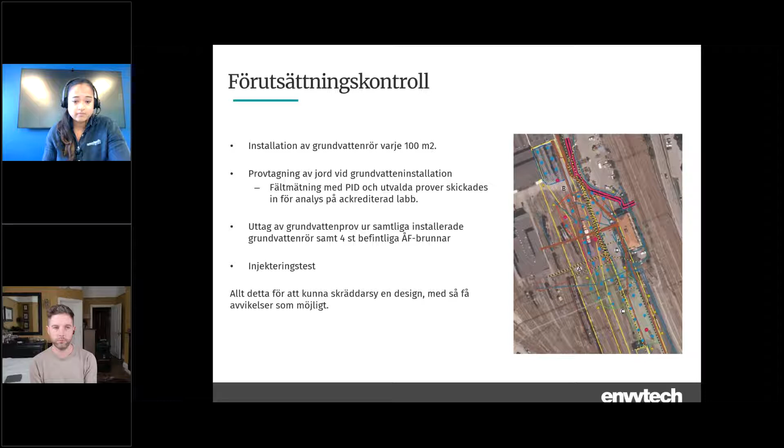Resultaten från förutsättningskontrollen visade att det förorenade området som fanns i förfrågningsunderlaget ökade både i djup och bredd. De 18 000 kubiken som man egentligen skulle hantera ökade med 67% till strax över 30 000 kubik.

När vi även gjorde undersökningen så såg vi att det fanns flertal kontrollbrunnar med frifas där vi kunde mäta upp till 30 cm i vissa brunnar. Vi fick även 9 stycken kontrollbrunnar som påvisade föroreningshalter över 30 mg per liter, det vill säga koncentrationen petroleumföroreningar, vilket är ungefär brytgräns för när man kan påträffa frifas. Och allt detta gjorde att vi fick tänka om designen lite grann, eftersom de föreslagna behandlingsprodukterna inte är anpassade för att behandla frifas.

Under förutsättningskontrollen så kunde vi heller inte hitta en avgränsning ut mot stambanan eller mot det vi kallar för Vita villan, det är den byggnaden som är öster om. Vi kunde heller inte hitta någon avgränsning mot diesellokverkstan eller runt vändskivan, vilket gjorde att vi behövde fundera ut hur vi skulle hantera de här områdena.

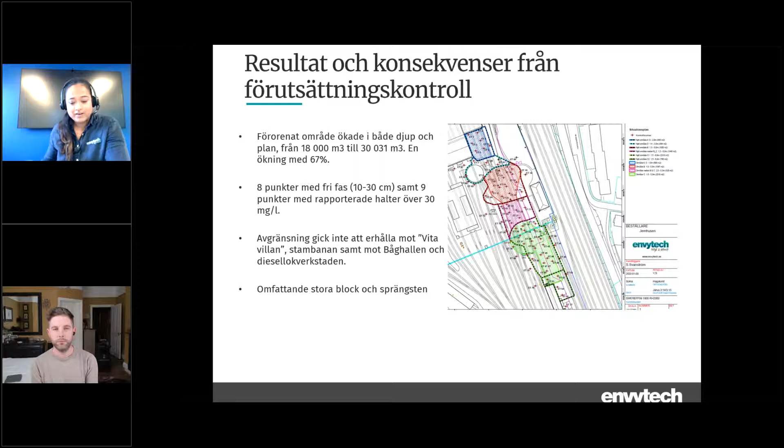Den fria fasen var något vi inte kunde utläsa i förfrågningsunderlaget, men som vi stötte på, och den var vi tvungna att hantera. Planen var att hantera den med vakuumextraktion. Det är 2 områden där vi hittade frifas: den norra delen där tankstationen finns, och den södra delen där cisternerna fanns.

Det vi gjorde var att installera vakuumextraktionsbrunnar lite tätare inom områdena. Totalt sett installerade vi 28 stycken. De här vakuumextraktionsbrunnarna kopplades sedan till vakuumpumpar som bestod av pumpen i sig och sedan ett kolfilter för att hantera ångorna.

Från pumparna pumpade vi vätskan till en vattenreningsanläggning som bestod av en oljeavskiljare och filteranläggning innehållande sand och kol. In situ-saneringen med vakuumextraktion pågick i 6 månader innan vi inte längre såg någon rebound av frifas. När vakuumextraktionen avslutades hade vi hanterat strax över 40 ton produkt och renat 497 kubik vatten.

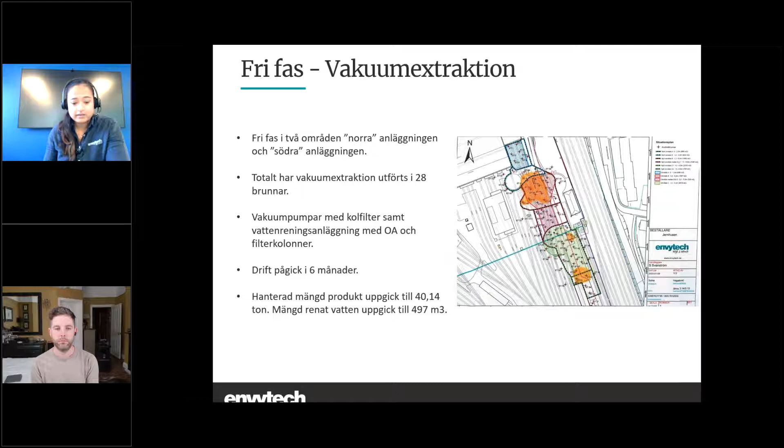Den design som togs fram gick ut på att vi skulle injektera kemiskt oxidationsmedel i hela jordprofilen, och detta i 3 omgångar. Sen skulle vi även gå in med en omgång syreavgivande medel för att stimulera den naturliga nedbrytningen. Produkterna som vi hade tänkt oss för saneringen är inte heller riktigt lämpade att använda i den omättade zonen, så vår tankegång var att försöka överdosera produkt i det området.

För att säkerställa att vi inte får någon återkontaminering ner i de mättade zonerna, där vi vet att produkten har en bra verkningsgrad, beslutade vi att installera en kolbarriär horisontellt vid smearzonen inom hela området. Genom att ha den här barriären installerad kan vi också säkerställa att den förorening man kanske inte kommer åt, på grund av ledningar eller andra installationer i marken, inte perkolerar ner i det redan sanerade området.

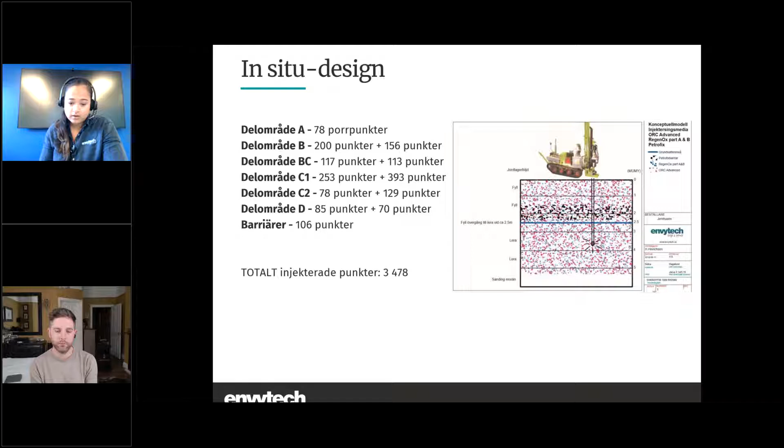De produkterna som vi använde oss utav var RegenOx Part A och Part B, som är kemiskt oxidationsmedel. Vi använde oss också av ORC Advanced, som är det syreavgivande medlet, och till slut Petrofix, som används som en aktiv kolbarriär. Jag tänkte att Jack nu skulle få presentera de här produkterna lite mer.

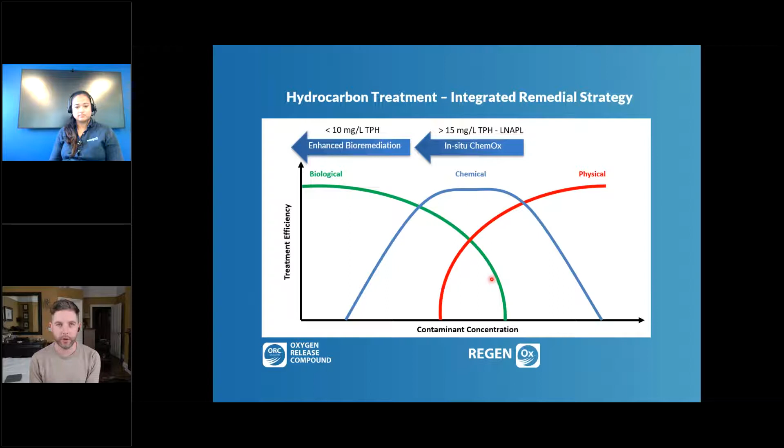So we then went further. We utilized a technology called ORC, which stands for Oxygen Release Compound Advanced, to enhance the aerobic bioremediation at the Hagalund site. So we went from physical treatment, removing as much of that free phase as possible, then dropped onto in situ chemical oxidation to drive those dissolved phase concentrations down, so that what was left over was more amenable to aerobic bioremediation.

Now we also had an additional product that we used here. At the time of the Hagalund going ahead, it was considered quite a new technology. It's now been out for about 3 years, and it was Petrofix, this liquid activated carbon. To date, Hagalund is the largest Petrofix job ever completed across Europe.

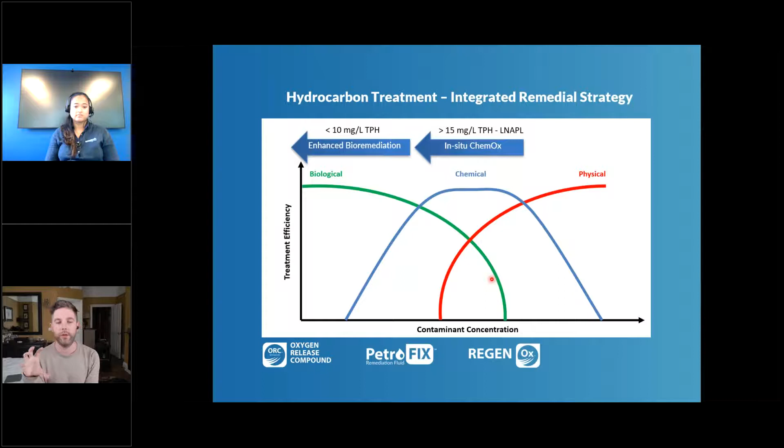And here what we did is we installed that horizontal barrier to stop percolation of contamination if there was anything untreated, or if there was a future spill, being captured by the Petrofix barrier, so sorbed and then biodegraded as well.

So the first technology I'll talk to you about then is RegenOx. So RegenOx is an in situ chemical oxidant. In situ chemical oxidation is the in-place treatment through the addition of a chemical oxidant.

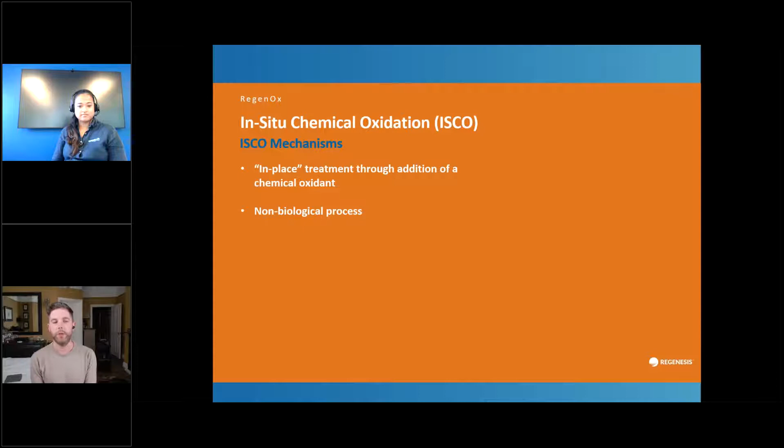It's often thought of as a biological process. Sometimes people get in situ chemical oxidation and bioremediation mixed up. It isn't, it's a non-biological process. It's essentially a redox reaction between the chemical oxidant and the organic contaminant.

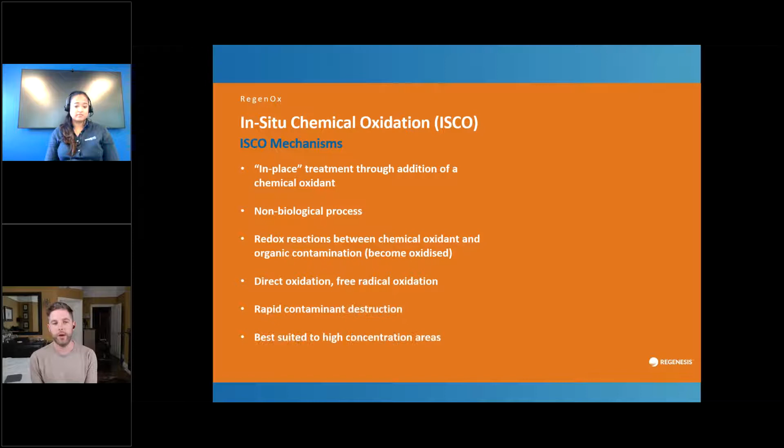It's a very useful technology if you're looking to clean up a site very quickly, as they were here at Hagalund, because it reduces contaminant mass very quickly and can then lead on to additional phases of treatment.

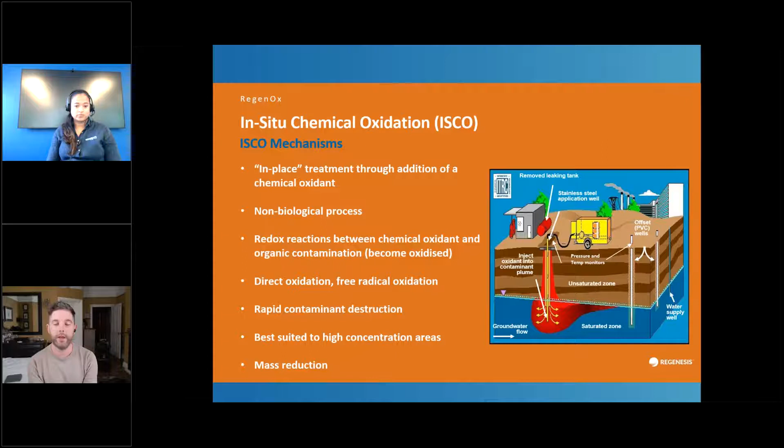Chemical oxidation historically, though, had a number of problems. People would use hydrogen peroxide to activate things like chelated metals, and you'd end up with a large exothermic reaction, quite an explosive reaction, that led to issues with increases in temperature or pressure in the subsurface, and also had a number of safety concerns to the site personnel applying the product.

It was also that some chemical oxidants are not compatible with underground infrastructure. Here there were cables and other services running beneath the site, as well as above ground infrastructure, so the rail tracks etc. And some chemical oxidants can corrode metals and surfaces in the subsurface, and they can also corrode pump and treat systems as well. So here in parts of the site, they were doing vacuum abstraction and the injection was going on elsewhere.

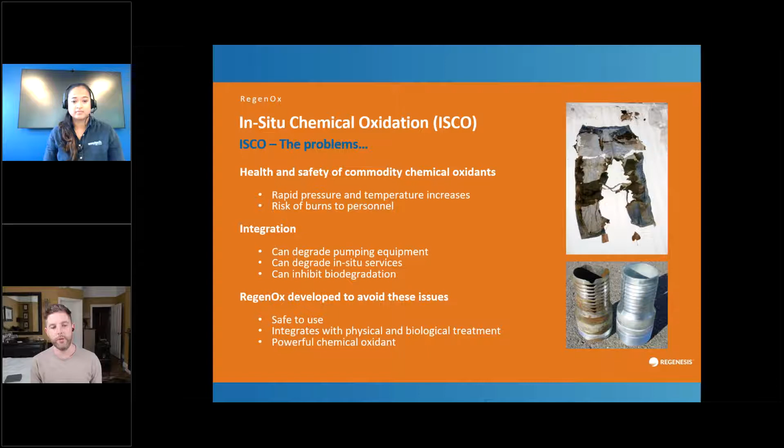So we developed RegenOx to overcome these problems, to make it a very safe technology to deploy. It ensured that it integrates well with pump and treat and biological treatment without compromising on the power of that chemical oxidant.

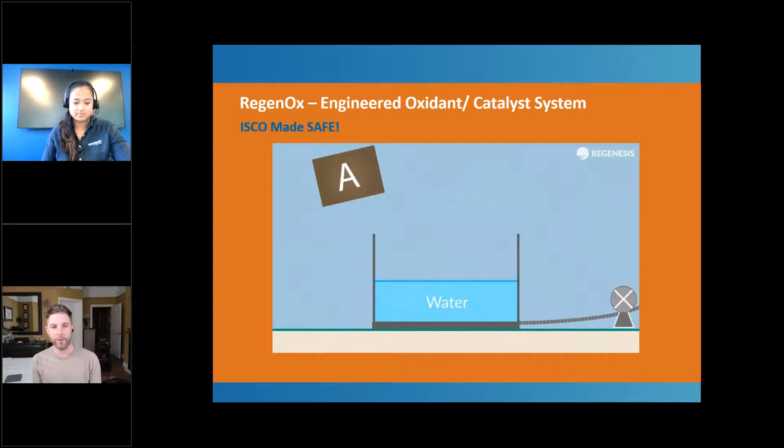So in terms of what it is and what it looks like, it's a two-part product. Part A is a white powder, a percarbonate-based chemical oxidant. And then part B is this iron silicate catalyst.

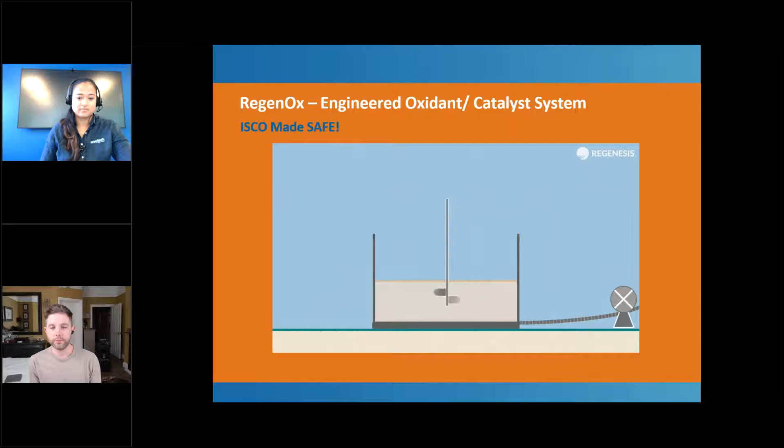Typically, you mix that at 5% with water, and then you simply inject it, as EnvyTech did in Hagalund, using direct push injection, but it can be injected into wells or applied into excavations into the subsurface.

Now, as I said before, some of the key things with RegenOx is that it is very safe to handle and apply. This was an active rail site, so you couldn't use something that was dangerous. And we've slowed that chemical oxidation reaction down so that it has significant longevity.

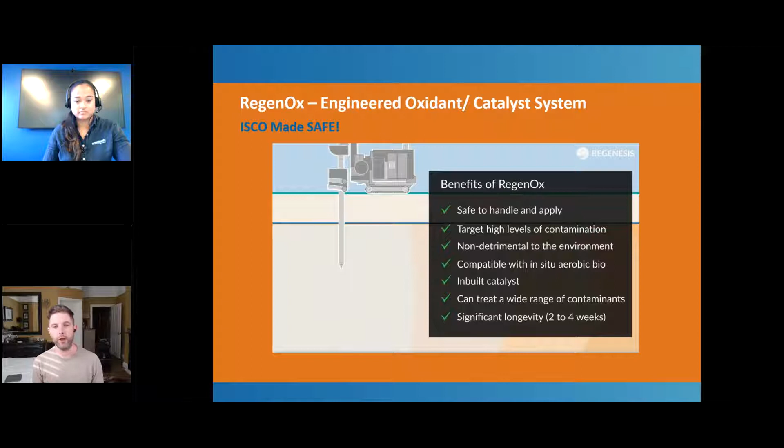So it actually has a residency time of about 2 to 4 weeks. Now that's important. You want your chemical oxidant to be active for an extended period of time, because the longer it's active for, the higher the probability of that contact occurring between the oxidant and the contaminant.

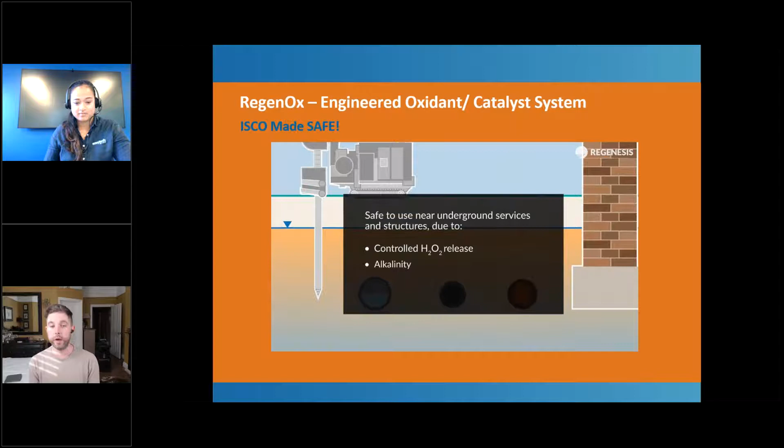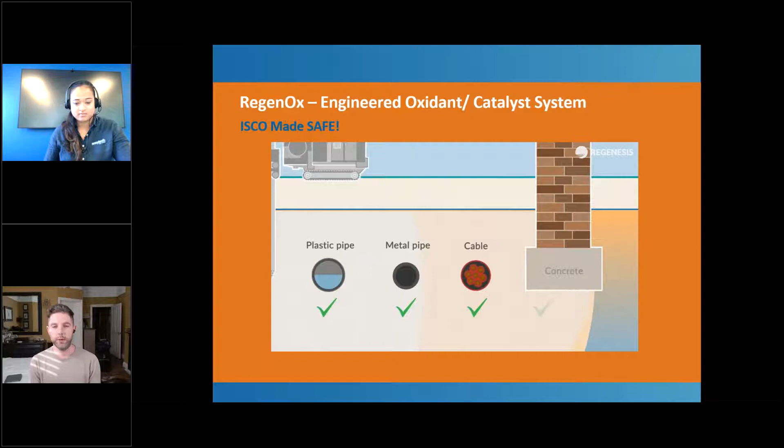Now, again, as I sort of highlighted, it was important that it was compatible with underground and above ground infrastructure. With RegenOx, you can inject it right next to plastic, metal pipes, electricity cables, and right up against foundations as well. Some persulfate-based chemical oxidants can corrode things like brick and concrete. Here we didn't have this problem on this particular site.

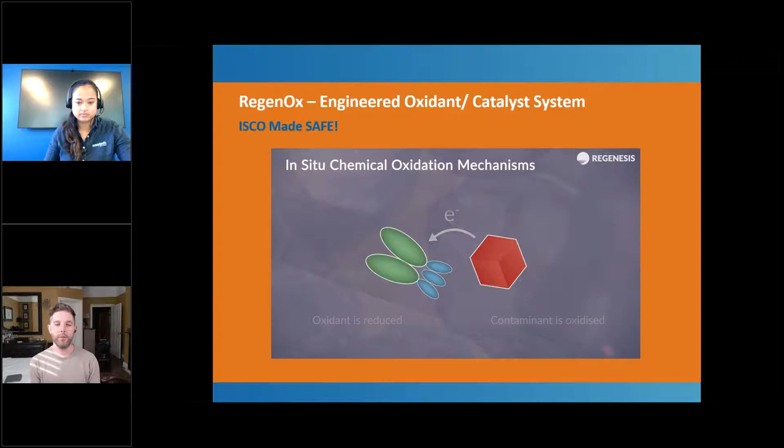In terms of the chemical oxidation process, what's going on? What you have is your contaminant and your oxidant. When they make contact, the oxidant becomes reduced and the contaminant becomes oxidized. You get that exchange of electrons that breaks apart those chemical bonds and destroys the contamination in situ. So that's direct chemical oxidation.

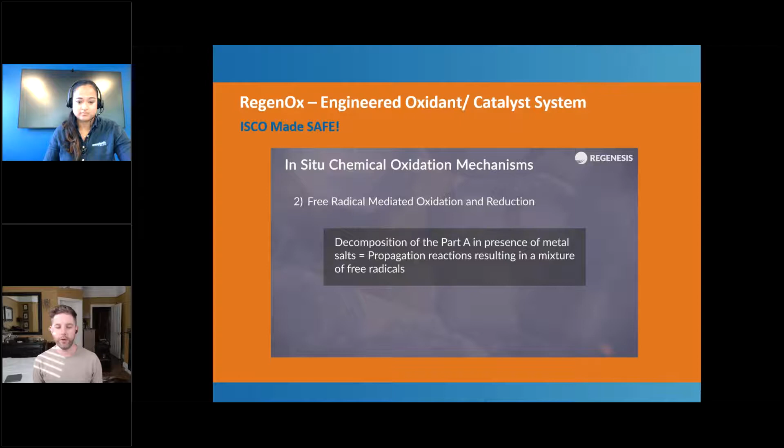What also happens is once the RegenOx is injected into the subsurface, it will start to decompose in the presence of ambient salts and metals. And as it decomposes, it will generate these things called free radicals. Now, free radicals are just molecules with unpaired electrons. So they're really reactive, and they want to react with everything, including the contaminant. So as soon as they make contact with that contaminant, that exchange of electrons happens again, and that contamination is broken down in situ.

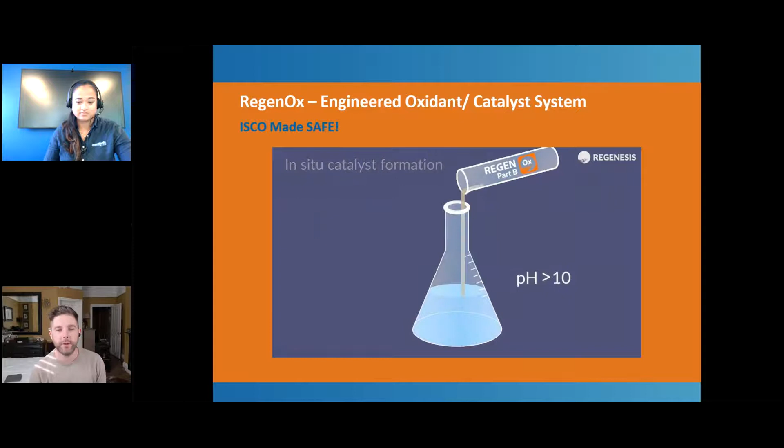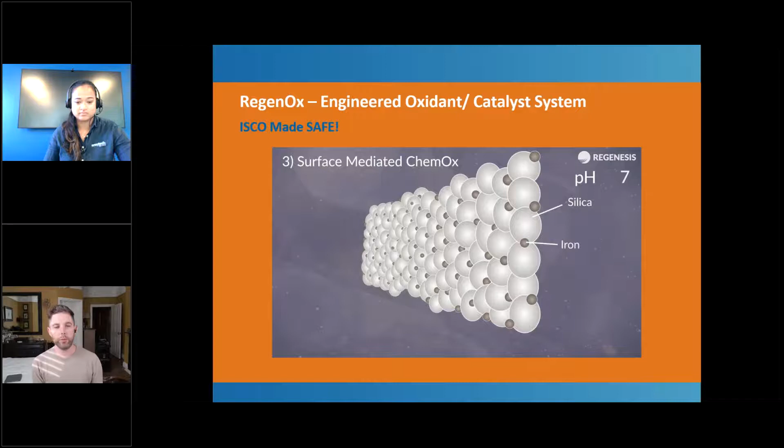Finally, the surface-mediated chemical oxidation. Initially, RegenOx is base activated, so it will raise the pH of the aquifer temporarily, but then eventually that pH will start to drop as it gets buffered out by the soil chemistry in the aquifer. And as that pH starts to drop, this iron silicate catalyst will precipitate, and it will provide a surface where the contaminant and that oxidant can make contact. So it's about improving that efficiency once that pH has dropped off in the subsurface.

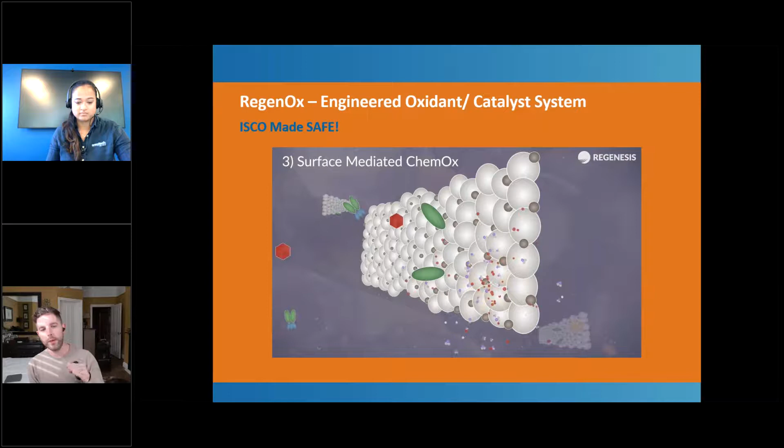So here in Hagalund, we were recommending multiple applications. This is typically required when you're looking at in situ chemical oxidation as a treatment method. The reason for this is chemical oxidation as a process occurs in the dissolved phase. So that's where those chemical reactions occur. The thing is, we don't just have contamination in the dissolved phase, right? We don't just have contamination in the groundwater. There's also contamination in the soil. So what we do is we recommend 3 applications to ensure that contamination in both the soil and the water is destroyed.

So after 1 application of RegenOx, you'll reduce the proportion of that contamination through destruction, through chemical oxidation, but largely the amount of contamination that is in the soil will be untouched. But what we've done here is we've created a concentration gradient. In the case of Hagalund, there's more diesel and hydrocarbon contamination on the soil than there is in the groundwater. So we've created that concentration gradient. So what does that mean? It means that you will then get diffusion because of Fick's law, and that contamination that's on the soil will partition into the water.

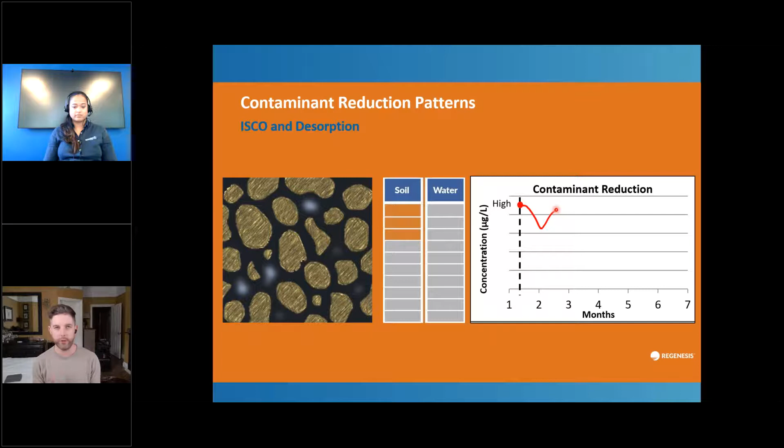So actually, when you've done 1 chemical oxidation hit and you let it then rebound, if you took your sample from your groundwater, it would appear that no remediation has happened, no reduction in contaminant mass has occurred at all if you're just looking at the groundwater. The reason for that is that mass has now desorbed from the soil, you've got rebound, and it's bounced back in the water.

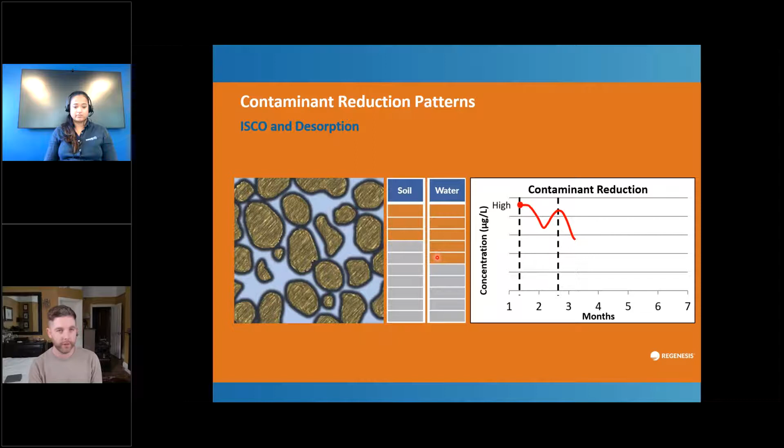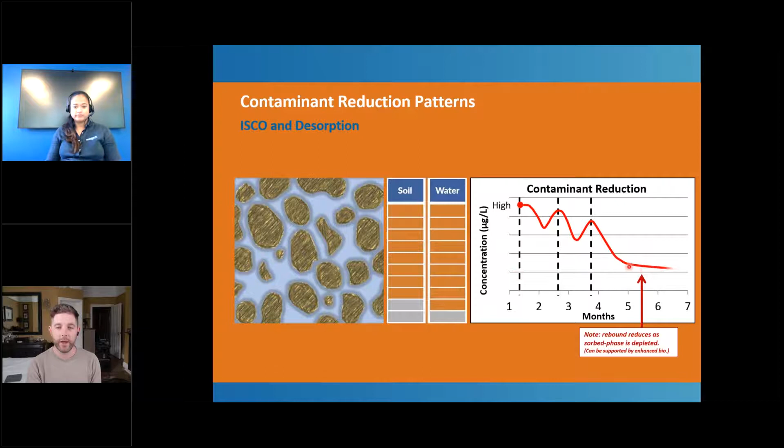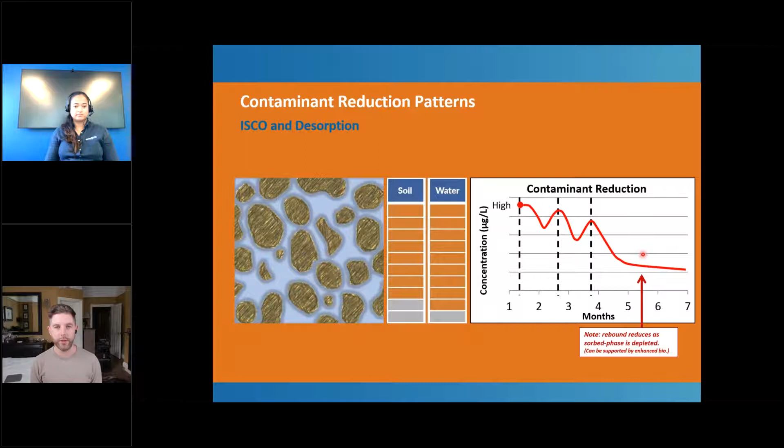So we do a second hit of RegenOx to remove that contaminant mass in the soil. You then, again, create this concentration gradient, slightly less so the second time. You then get this rebound. You then do a third injection of RegenOx. Sometimes you don't need 3, sometimes it can be 2, sometimes it can be 1, might need to be 5. We'll help you come up with a design for that to reduce that mass further in the water. And then you can follow it on with bioremediation. As those concentrations start to drop, contact becomes less and less likely. So it's at this point that we would start thinking about enhanced aerobic bioremediation to carry that contaminant reduction forward.

Essentially, what happens is that these microbes do take a bit of a knock, but by no means have we sterilized the subsurface. They're still there. And it's important to remember that these microbes grow exponentially. So 2 microbes become 4, become 8, etc. So they grow very quickly in the subsurface. What we've also done by undertaking chemical oxidation in this way is actually created an environment that is temporarily very favorable for aerobic bioremediation. So you've done chemical oxidation, you've partly chemically oxidized those petroleum hydrocarbon molecules in situ, and what you've created is polar, more soluble molecules.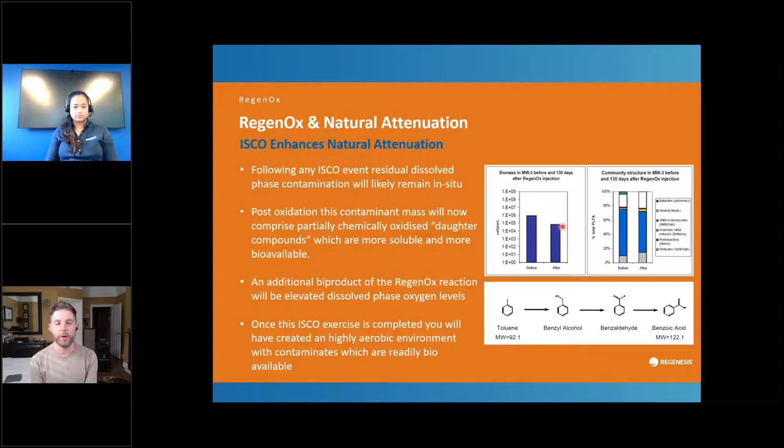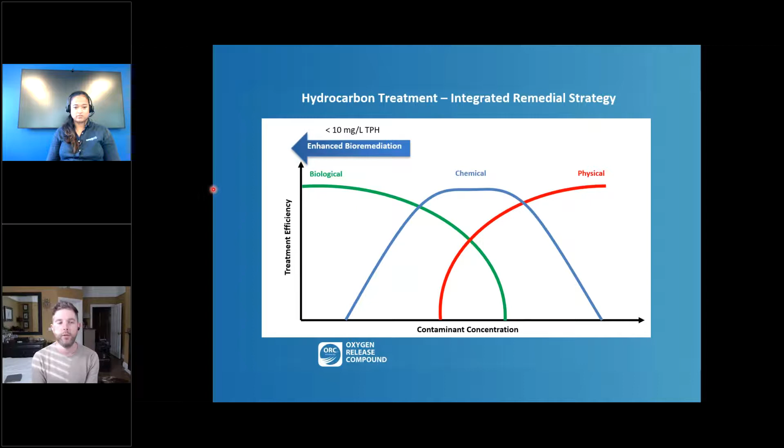But the thing is that oxygen won't last forever. It will get used up by the microbes to metabolize these contaminants that are left behind in the subsurface. So what you want to do is supplement that with a controlled release oxygen compound, something like ORC Advanced, which was used here, to maintain that biological efficiency right the way through long enough so that you hit your remedial targets. And the remedial targets here in Hagalund were certainly quite stringent.

So ORC, what it does is it increases the rate of natural attenuation. So it increases the rate at which these microbes break down that residual contamination. Now, the rate of natural attenuation is dependent on a number of different factors. So the contaminant type has an influence. So the type of petroleum hydrocarbon that you're trying to break down will affect how quickly those microbes will work.

So as an example, it's much easier to aerobically degrade gasoline than it is diesel. It's also much easier to degrade BTEX compounds than it is polyaromatic compounds. It's all down to the structure and crucially solubility of that particular contaminant. Now, environmental influences also matter.

So we do see in Scandinavia, particularly in my experience in Finland, that temperature has a significant influence on bioremediation. Here in the UK, not so much. Our groundwater temperatures are pretty static, but you do see in some cases, in some sites, particularly in the far north, where groundwater temperature dips below, say, 8 or 5, microbiology slows down.

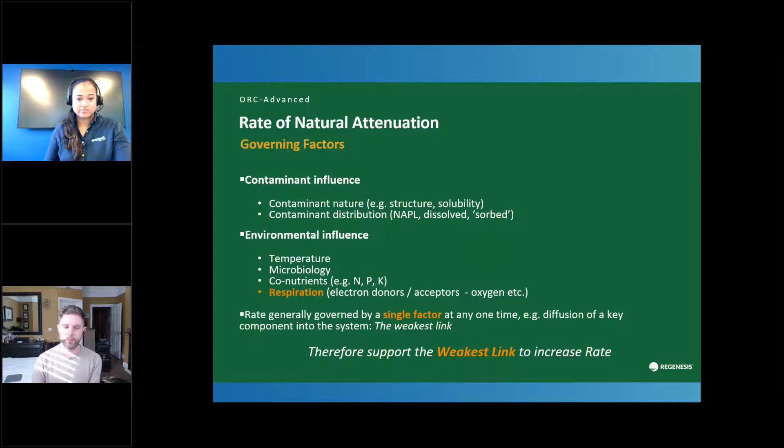Microbiology, so I would say for petroleum hydrocarbon remediation, I've yet to see a site where we've needed to introduce microbes into the subsurface to kickstart the aerobic bioremediation process. The availability of co-nutrients is important, but not critical. And often the single weakest link here is the availability of oxygen in the subsurface. So if you add oxygen, you create an environment conducive to aerobic bioremediation. You can kickstart this process.

And what these microbes are doing, they're cascading electrons from donor compounds to generate the energy that they need to live. So the food, in this case, is the contaminant, and then you have different electron acceptors that can be used to generate this energy. Now, oxygen is by far the best electron acceptor that they can utilize. They would favor that. It gives them the biggest payoff. It provides the most energy.

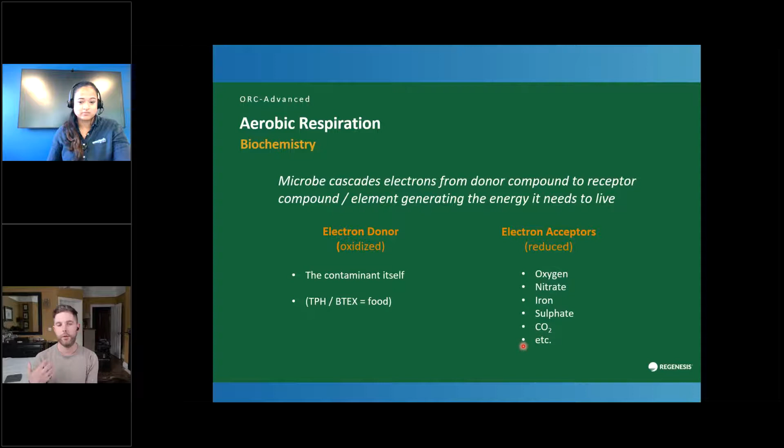But they can use other electron acceptors as well, such as sulfates and nitrates. But as you move down this redox table, the amount of energy that's released becomes less and less. So they prefer oxygen. So we have this product called ORC, stands for oxygen release compound. What it is, it's a calcium oxyhydroxide with a phosphate crystal interpolated into that structure.

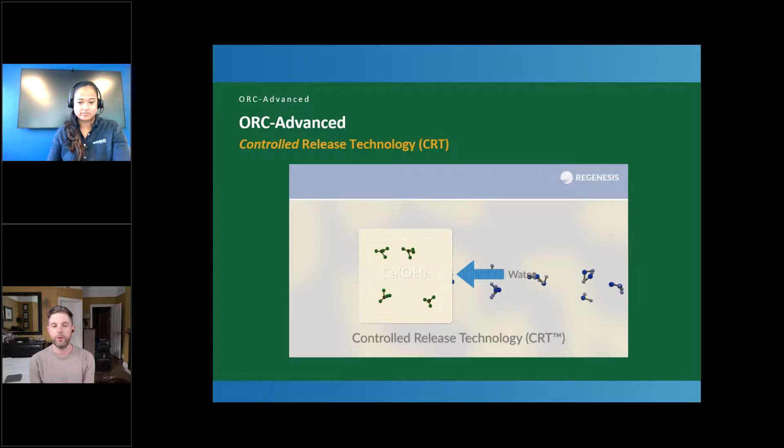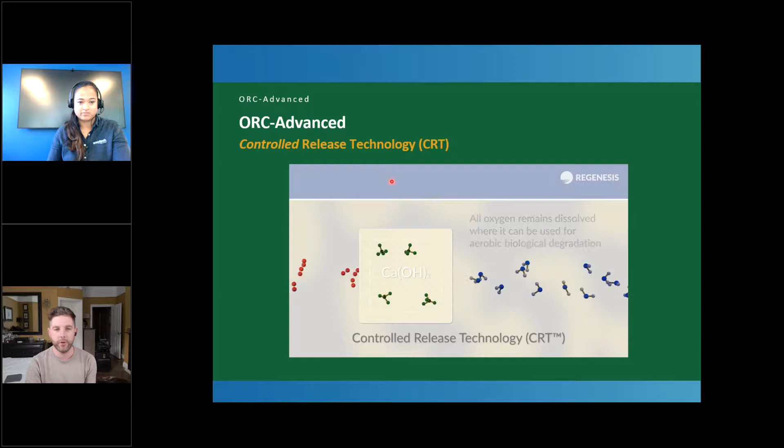So what happens is when you inject it into the subsurface, it starts to dissolve. And as it dissolves, it releases oxygen into the dissolved phase. And it's able to do that because that release of oxygen is controlled and regulated by these phosphate crystals interpolated into the structure. So it slows that release down and it ensures all of that oxygen is released into the groundwater. And that's important because if you had lots of bubbling or off-gassing, that oxygen would just escape to the atmosphere and it can't be utilized by the microbes in the aquifer.

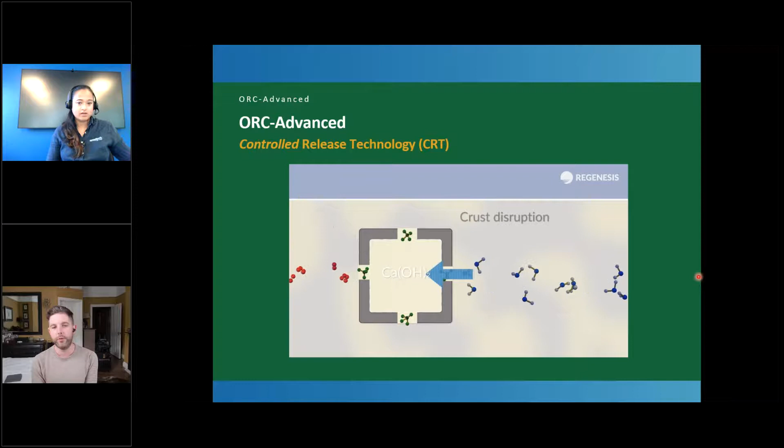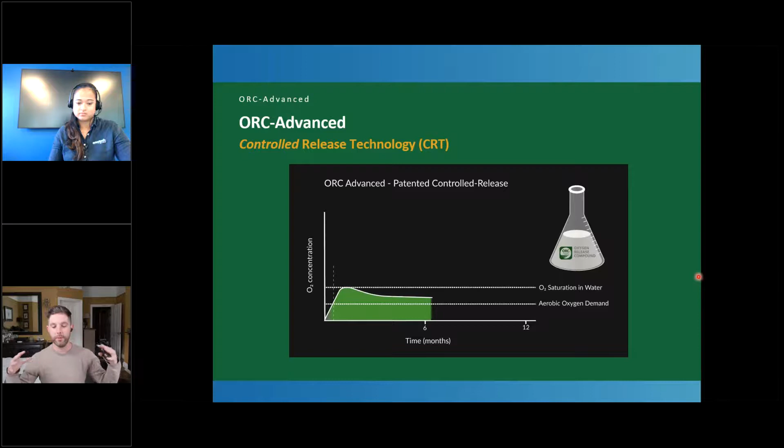These phosphate crystals also have another job. They disrupt an impermeable rind forming around the calcium oxyhydroxide. And what that means is you get a controlled release of oxygen over a 12-month period of time that will create a stable geochemical environment in the aquifer. So we grow as much microbial consortia as possible, so we can break down as much of that contamination as possible in a 12-month period.

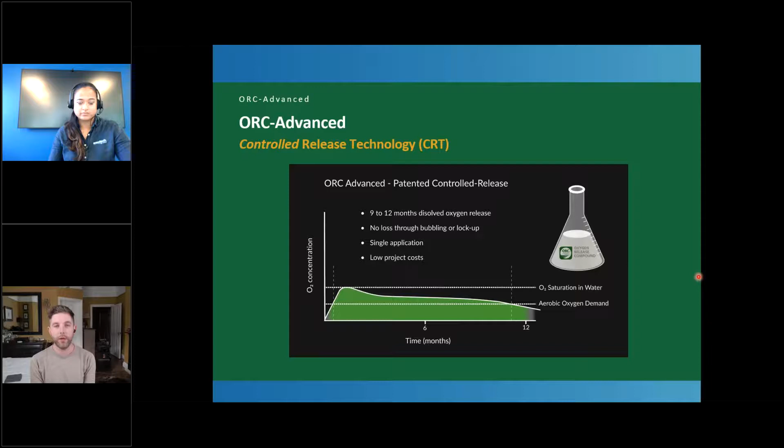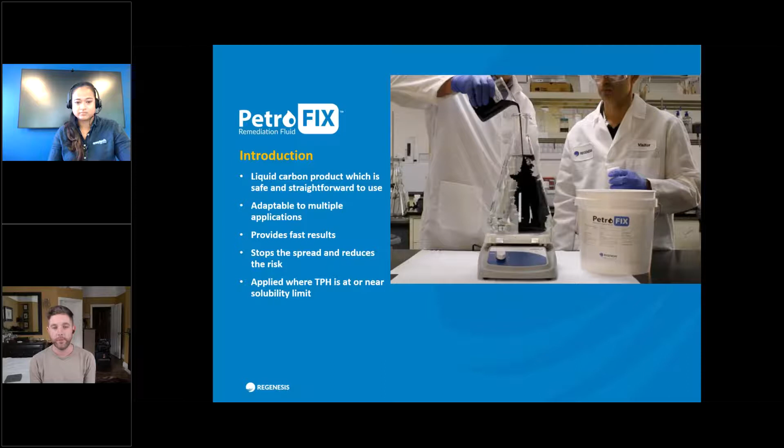Now, the final part that was used was PetroFix in a series of barrier configurations. So what PetroFix is, it's a two-part product. What we've done is we finely milled granular activated carbon down to 1 to 2 microns. So that's the size of a bacterium. That's smaller than a pore throat. It's about the size of a red blood cell. And what we've done is we've coated it in a dispersion agent.

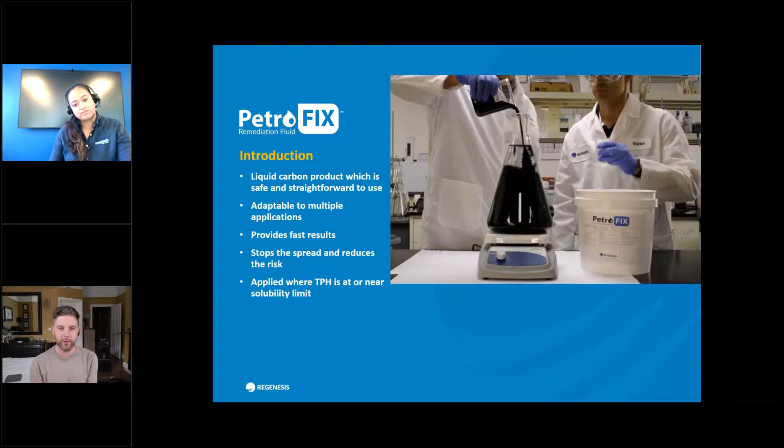So when you mix it with water, as you can see here, it creates this colloidal suspension. So milk is a colloid, ink is a colloid. It means that when you inject it into the subsurface, it flows very freely in the aquifer. There's a second part to this product, which is an electron acceptor blend that comprises nitrates and sulfates.

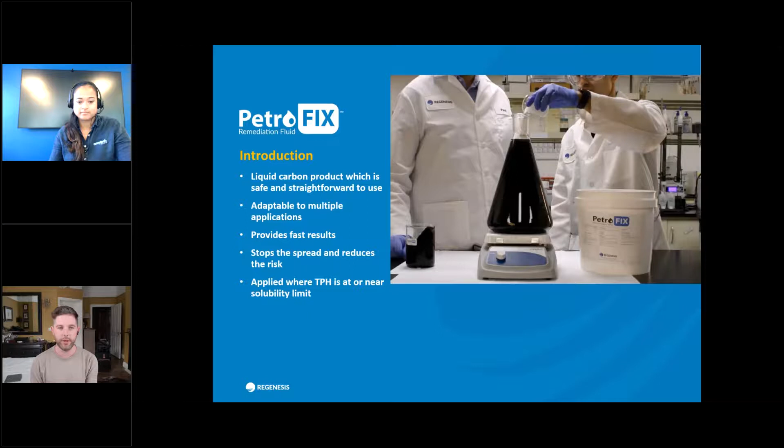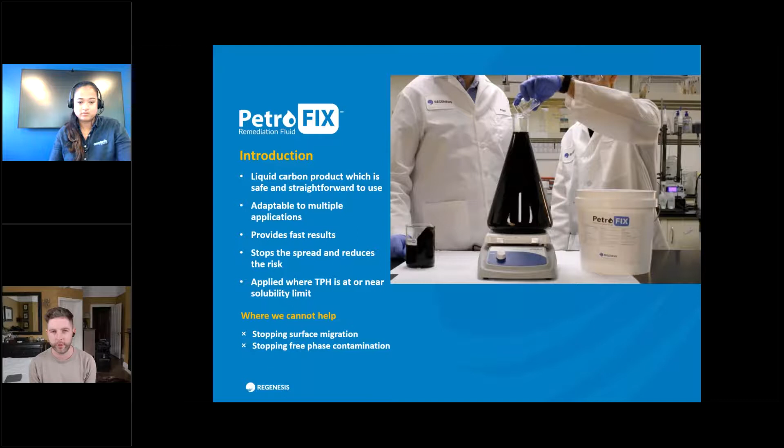That then helps to kickstart the anaerobic bioremediation process as well. As a technology, we can apply it where petroleum hydrocarbons are at or near solubility limits. It's not a technology that you can use to, say, stop surface migration following an oil spill, and it certainly can't stop free-phase contamination. However, if it does encounter free-phase contamination, it doesn't mean that it's broken. It's just going to take a while for those microbes to churn through it.

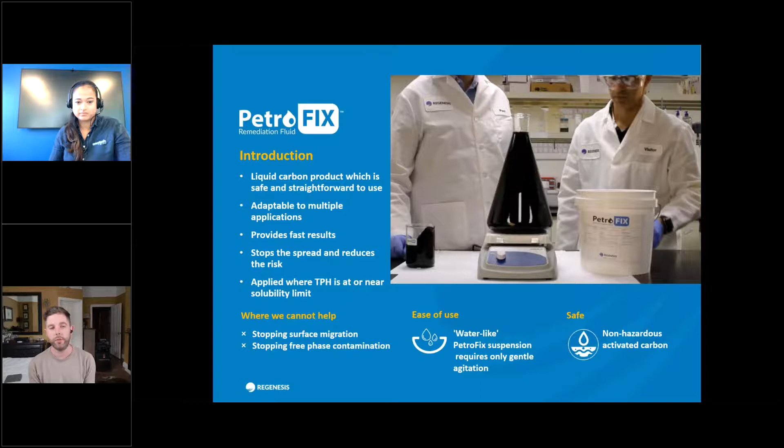It's also a non-hazardous product, and essentially once it's in the subsurface, you've installed an activated carbon filter that will be on for decades. So long after the active remediation has been finished, this PetroFix will continue to work for decades. So the remediation step then, you mix it with water, you inject it into the subsurface, and it will paint the subsurface with carbon. So you create this carbon filter in the subsurface.

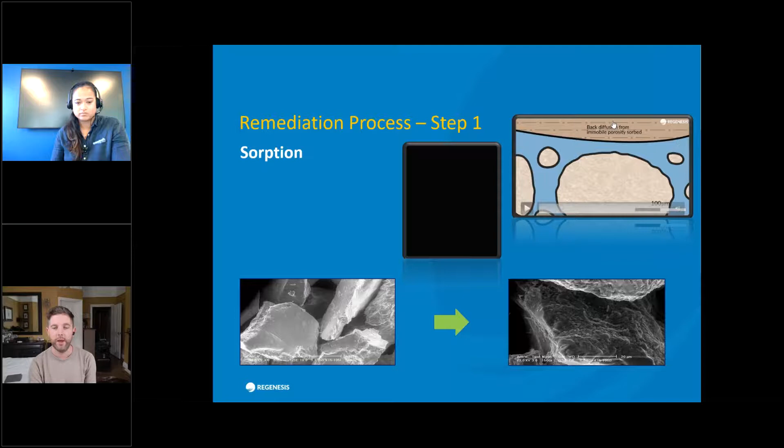That means that as the contamination, sorry, my video stopped there. As the contamination passes through the aquifer, the contaminants are captured and adsorbed onto the surface of that PetroFix matrix. It's also going to coat lenses of clay, etc. So if you've got sorbed contamination, it's going to coat the outside of that clay and stop anything back diffusing into the aquifer.

The second step is this biological degradation. So here we had the advantage of putting ORC in, but we're also putting a mix of sulfates and nitrates into the subsurface that can kickstart and then maintain anaerobic remediation as well. So you have a cocktail of different electron acceptors that syntrophic microbes can then use to break down contamination in situ.

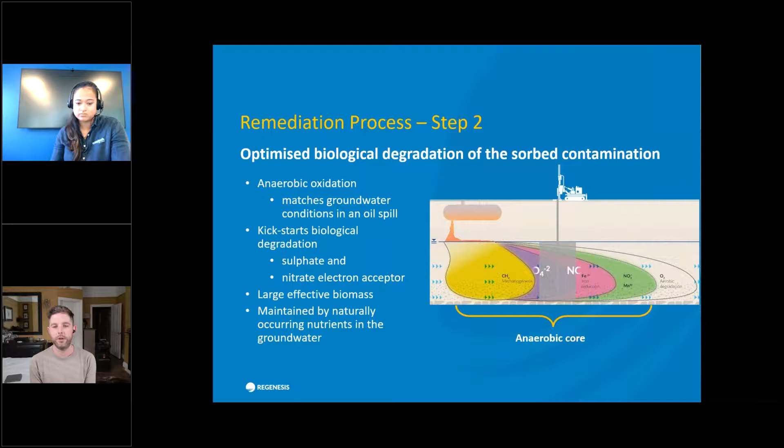This then means that over the long term, as that contamination advects and diffuses through the aquifer, you've created a diverse microbial consortia that, once that contamination is sorbed onto the PetroFix, can degrade it in situ. And this enhanced biological degradation phase will go on for decades.

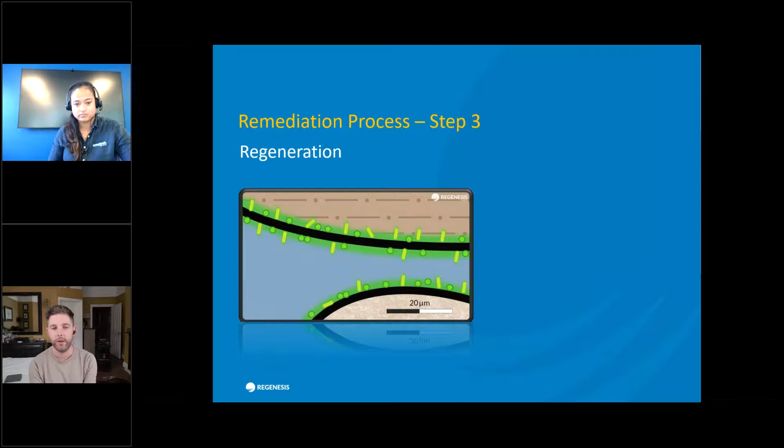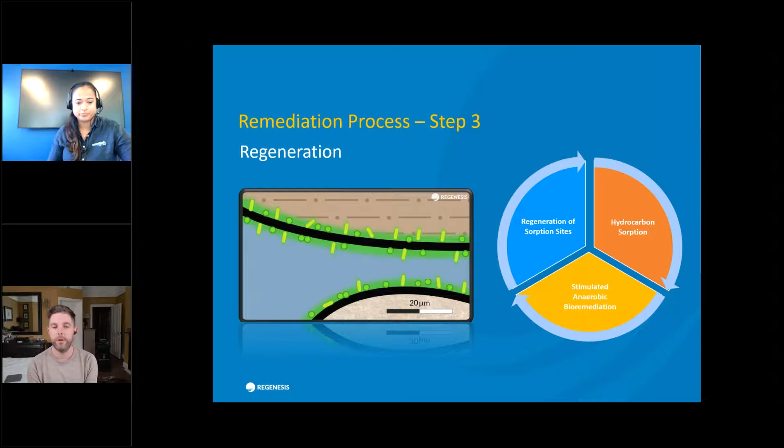So ultimately, what you're doing is creating a positive feedback loop in the aquifer. So you get this rapid hydrocarbon sorption. You then stimulate, in this case we were stimulating anaerobic bioremediation, and as those microbes degrade and break down that contamination in situ, the sorption sites on the PetroFix then get freed up. So any contamination that may be untreated, say in the clays, as it back diffuses out, gets captured by the PetroFix, it's sorbed, and then you get biological degradation there afterwards.

So the idea here, and what we executed, was an integrated remediation treatment strategy where firstly, physical remediation was taken where required, in situ chemical oxidation, enhanced aerobic biodegradation, and then finally a long-lasting PetroFix barrier was installed in the subsurface to provide continual remediation for decades.

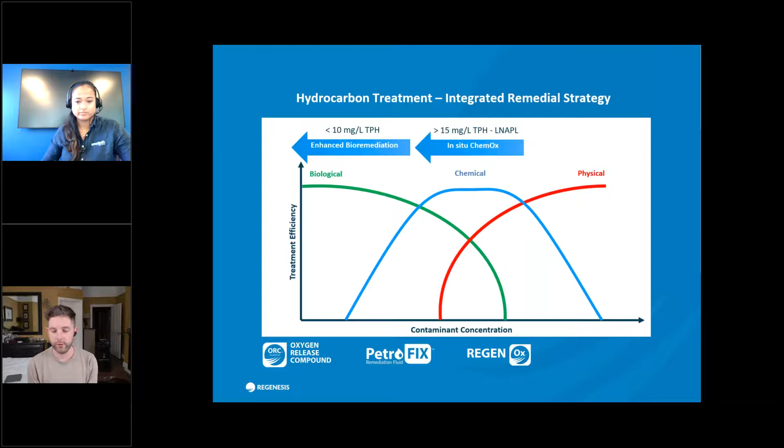I'm going to now hand over to Sai, who will finish everything off. I just need to switch back to the other presentation. Okay. Thank you, Jack. No problem.